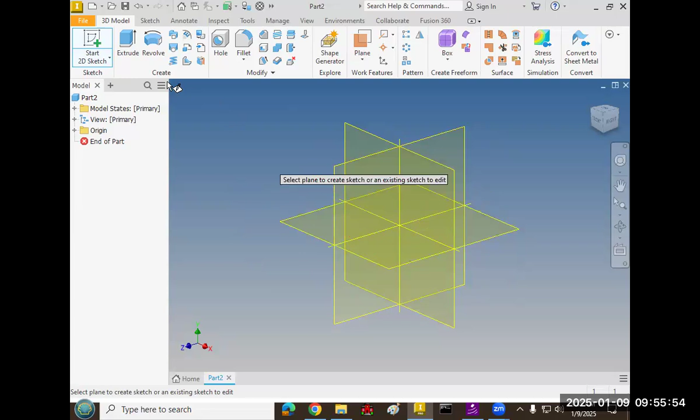Okay, so I'm going to start a new sketch and choose the XZ, or whichever the flat one is. Well, this doesn't really matter at this point. I need a 2-point rectangle, and I strongly recommend, again, starting from 0, 0, because it will make sure your origin planes slice right along the edge, which means all of your offsets will be multiples of 2 plus 1. So like an offset of 1 inch, 3 inch, and so on. But you'll see in a second.

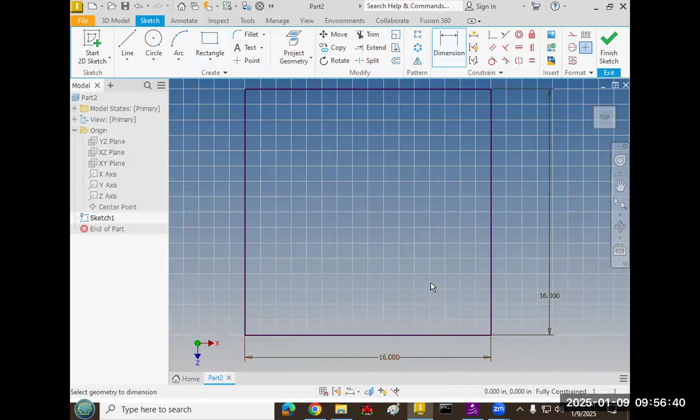We need to make this 16 by 16, home to zoom out, and then we're just going to finish sketch and extrude. And there's only one thing there, and the default's 1. Perfect. Okay. If you want to do some sort of embellishment on the end, like slanted, and you really should, it's not too much difficulty.

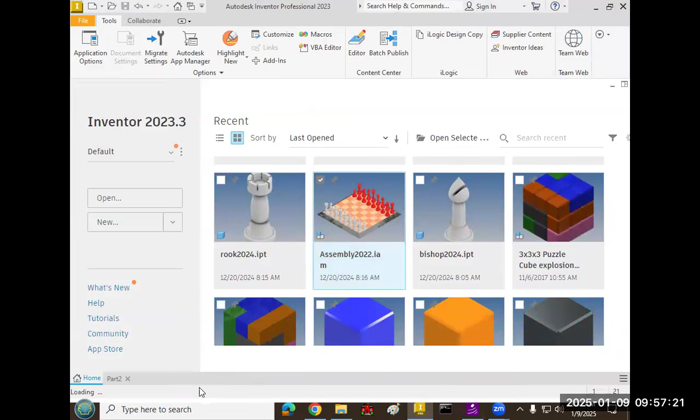Like in this old assembly, which I don't know why I decided to do that. It's going to take forever to open. But there's a chamfered edge, I guess, on the outside here, that slanted face. Make sure that extends beyond the 16 by 16. Okay, we want the 16 by 16 to be the plane surface, and we are going to be stuck waiting

for this to load because I made a poor choice. And we will all suffer for that poor choice.

And we continue to suffer.

There we go. Okay, so you can see here in this finished assembly, there is the plane surface, but then there's also this slanted extension. Start with the plane surface, make it 16 by 16. We're going to bring the image of the chessboard and make what's called a decal on top of it. And then after that, you can do like a rounded edge or some stair steps, or raised so it looks like an arena or something. Your call, it's creative stuff.

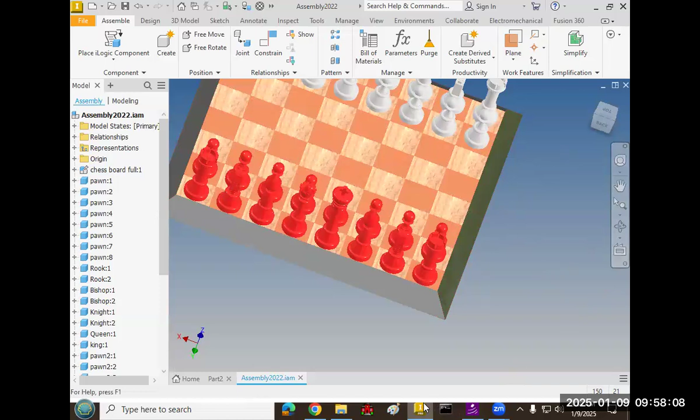But either way, we have a 16 by 16 inch panel that's flat with a 1-inch extrusion. And the way you get the image on is we need to start a 2D sketch on the surface. Orientation doesn't really matter, but I always like to work at it so its top is readable. And we are going to import an image, which is this one right here. That should bring up the Finder window, and you're going to choose the image that you just saved to your documents.

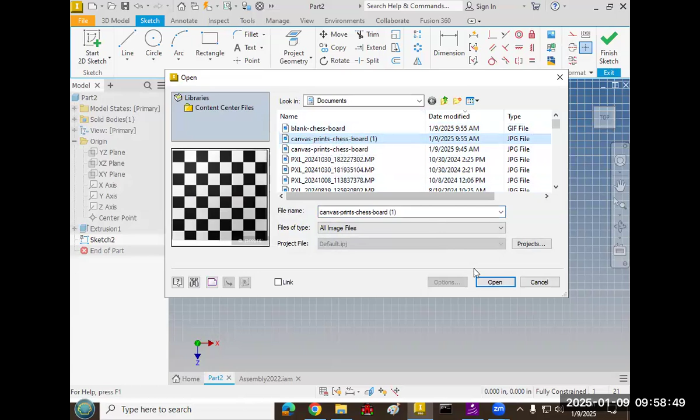Okay. And when you bring it in, you might think, let's snap it to the edge and constrain it. But you don't want to do that, because if your chessboard image has a border and you snap the corner of the actual image to the corner of the sketch, you won't be able to get rid of that border. It's a little not intuitive, the way the part that doesn't move; it's not like an image in a Word document or something, because it kind of tilts.

I don't know how you figure out which corner is going to be the one that doesn't move, but play around with it a little bit, try to get just the grid or just the checkerboard on the purple square area, and that's actually a little big. You can't do just sideways, it stays scale. Try your best. The better you do now, the better it'll be later.

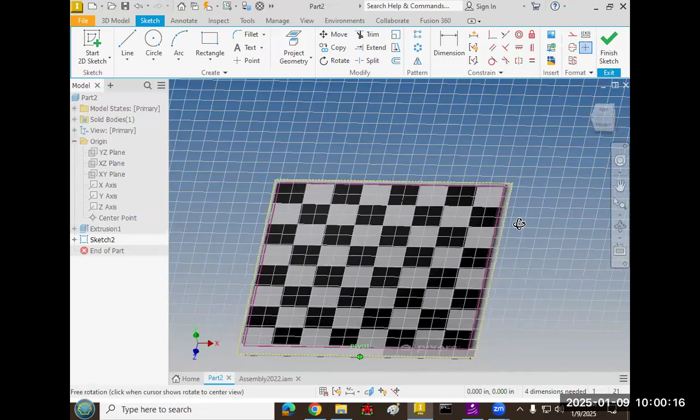Okay, so you can see I have the image extends beyond the surface, and that's, like I said, to get the border off. Once you have that good, you're going to do finish sketch. Make sure you do this next step, because you can hit finish sketch and it looks right, but it won't show up later. It's still just a sketch. You need to make a decal, like a sticker.

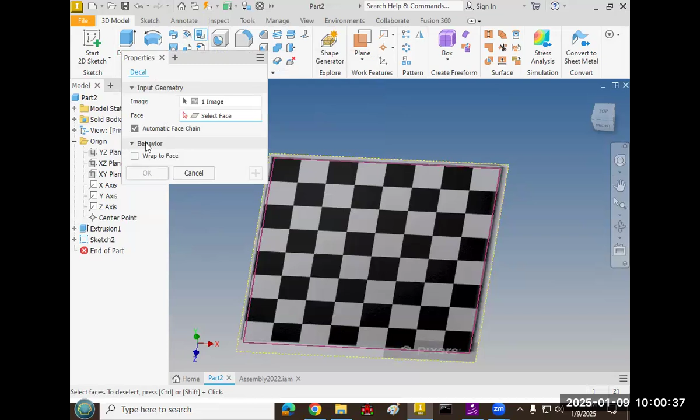When you click on decal, there are two things. The first one is the image. What image do you want to decal? The image you just did, click on it. And then what face do you want to decal it on? The one we just sketched on. And then hit OK. And now you can see it cuts off the edges cleanly. Unfortunately, I still have that watermark, but that's going to be fine for now. And there is my checkerboard.

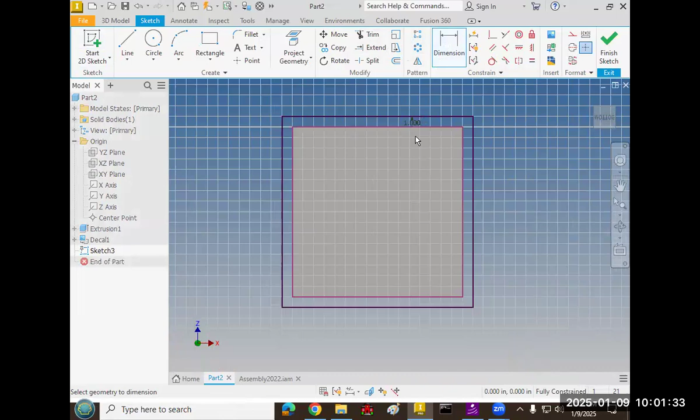You don't have to use a black and white one. Any standard checkerboard is fine. And I do want to make an extension there. So I'm going to start a sketch. I'm going to do an offset. Offset is this one; if you mouse over, you can see. And if I click the edge there, it'll make that shape. And I'm going to make it exactly 1 inch offset because I think it'll look good with the extrusion.

I'm going to finish sketch. I'm going to extrude just the rectangle I made, and I want this one to extrude up. Okay, so I have an extra inch, which looks fine also. And how about I fillet it? I'm going to fillet just the top edge here. This is all design stuff, it's your call. Maybe like 0.5. I think that looks pretty good.

And if you want a different material for the board, you can do that. Depending on your resolution, you'll be able to see either 0, 1, or 2 of these drop downs. If not, there's an extension double arrow. Change the one that says default. Default is the one that lets you change the color. Generic is the one that changes the material. Generic does change the appearance sometimes, but it's not as good, and it doesn't give you a little preview. And green polished is fine with me.

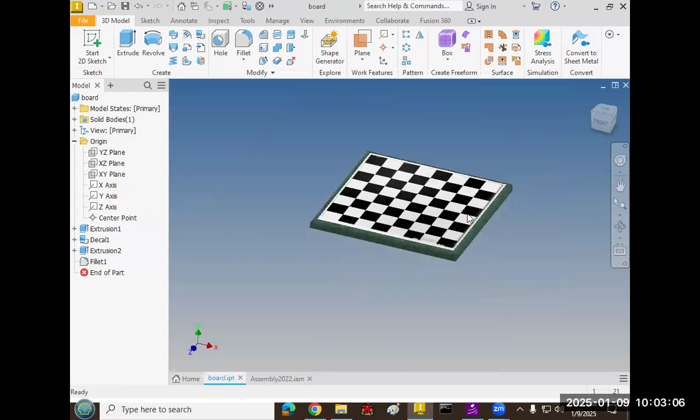So I'm going to save it, and I'm going to call it board, making sure that it is in the same folder. Although it's not super critical, it helps. Okay, so I have a part file for my board. Now, in order to do the assembly, I need to open up each of these pieces. I guess I don't have to open them all up at the same time, but why not? I can choose all of them. I opened the bishop already. And then open selected. Did I get them all?

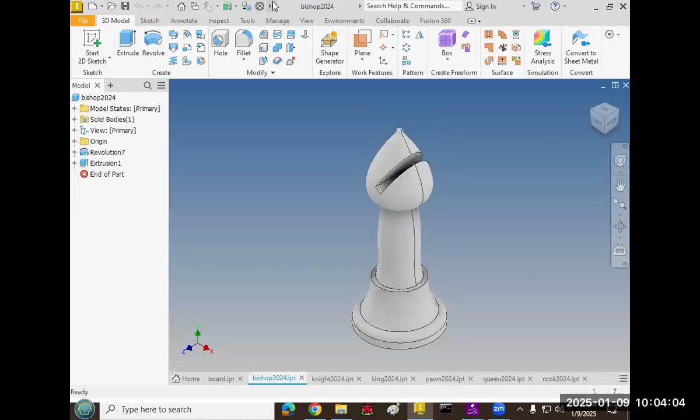This is my old assembly, I close that. Okay, I have bishop, knight, king, pawn, queen, rook. So I'm going to go through them one at a time. This is my main one. Make sure you do save as, and you can just call it something -2 or other team. Hold on, am I already in? I'm in default. Okay, so I'm going to choose the first team, and I'm going to do red versus green. Going to pick my 2 team colors.

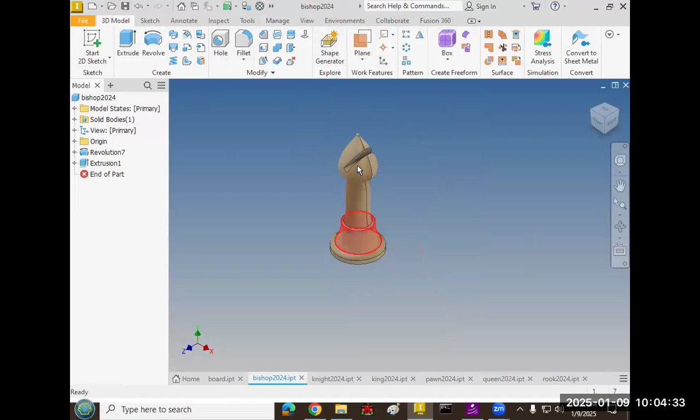Plywood is going to be one of my teams, and we'll solve the other one. So I'm still in the first part file, the first bishop. I changed the color. It made the color of the first team, which I need to remember is plywood. Saved it. Now I'm going to do save as. Call it bishop

-2 is fine. And then I'm going to change the color of that one to the second team, and I need to remember the color. Is that going to look? I don't think that's going to look different enough. Green, and I really shouldn't be spending that much time on this. Okay, that's fine. Who cares?

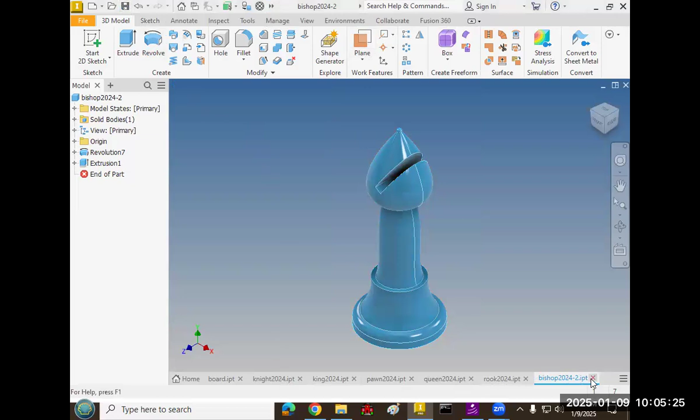So it's just for me, it's called Sky Blue. No, I'm gonna go with Sky Blue Dark as my other one, and my first one's called Plywood. So now I have 2 bishops. I have bishop-2, and it closed bishop 1. So I have 1 bishop and then the other bishop, plywood, and make sure you're not doing exactly the same colors as me. Just do original stuff.

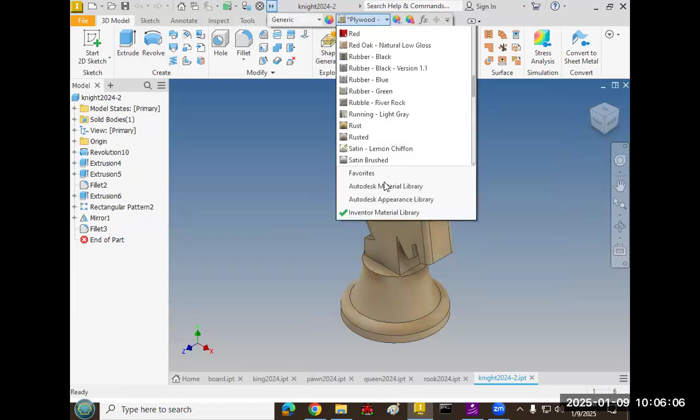So my first team here is called plywood, and I actually do need to do all of these so that the assembly looks right. So there's the first one. I'm gonna do file, save as, and call it knight-2. That makes a new file. And in knight-2, I'm going to change it to my other one, which is Sky Blue Dark. Save it and close it.

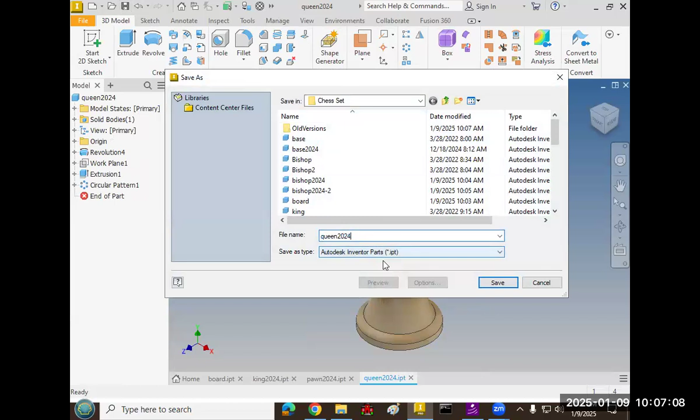And God, I hope the audio is recording.

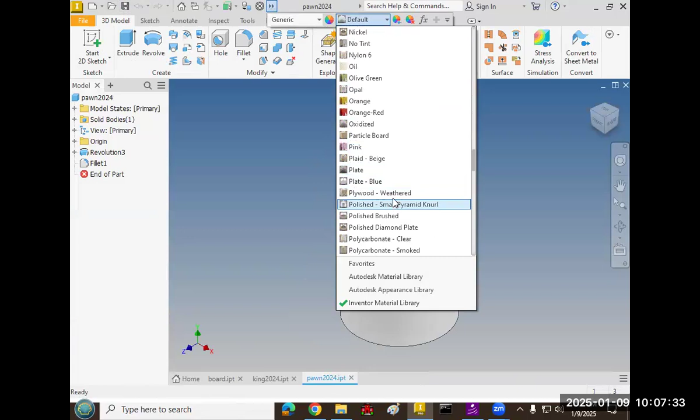So queen-2 is my blue queen, and I just need pawn to change it to my first team. You may have already chosen the color of your first team. That's fine. My first pawn, and save as is pawn2024-2. And we'll go sky blue dark and save, close the pawn, and one more.

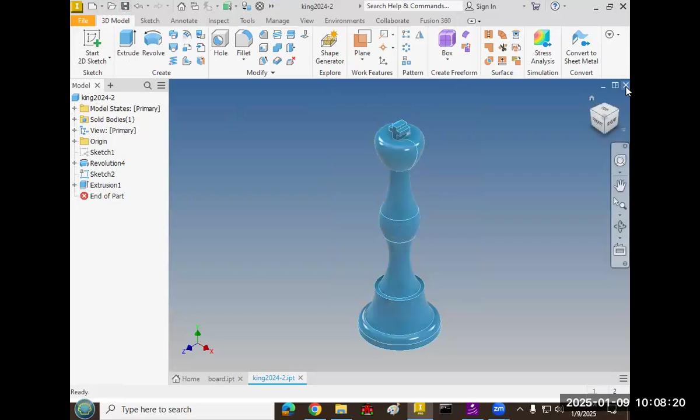And first team. Save, file, save as. All right, so this is the last one that I need a second color for. Sky blue dark. And save it. And we can close all of the part files. I don't even need the board open at this point.

So now for the assembly. New, from our special quick drop down, assembly. And I don't know why place iLogic is the standard. We just want regular place, and it usually pops up.

And the first thing that you want to do, and in fact, I need to make sure I don't dox myself here, or somebody else. Let's see, where is it? Documents. Not in documents. Puzzle cube, Menchie cube, train. Oh my God, where is it? Chain. Jet Set project. Where is it? Sorry, folks. Yeah, there we go.

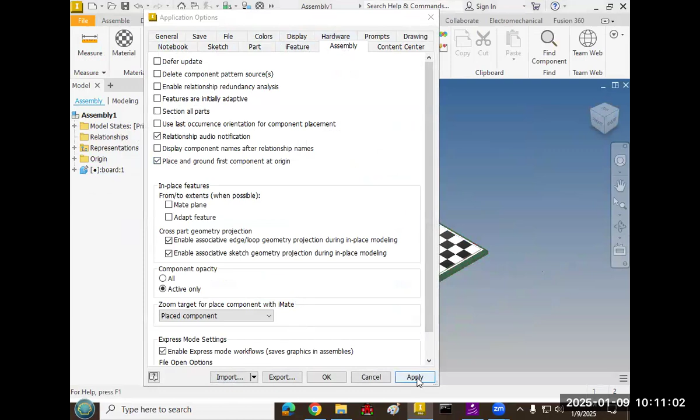That means it's grounded. The way to make sure the first thing comes in grounded is in Tools, Application Options, Assembly, and Place and Ground first component at origin. And then OK, apply, close, whatever. But if you didn't do that, it won't come in as grounded, in which case, if there's no push pin, when you bring the first thing in, you need to do right click and check grounded. That will lock it in place and make sure everything else moves when you constrain it.

Now, the other thing you'll notice is that you can turn on the visibility of the YZ plane, right click visibility, and for the other one, for XY, right click visibility.

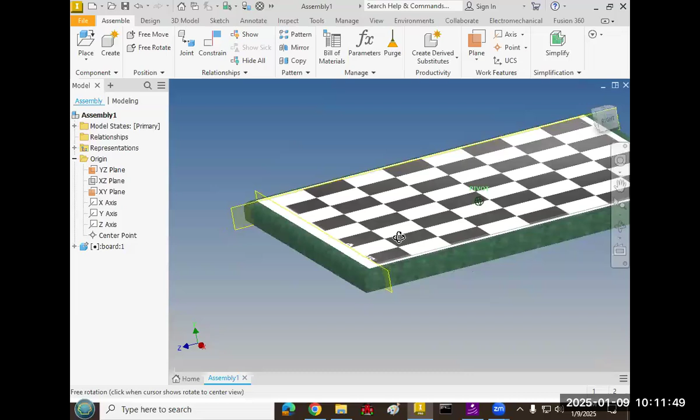Don't worry about whichever plane you drew on, because that's going to be the flat plane. And hopefully you can see those origin planes slice right through the edge of the plane surface. It's pretty close. And that is good because that will allow us to do a good offset.

Okay, so let's do the pawns first. I want to place a pawn from one team, and I'm just going to place it out in space. I know I'm going to need 8 of them. 1, 2, 3, 4, 5, 6, 7, 8. Right click, OK. It's probably easier if you just do right click and open up the pawn

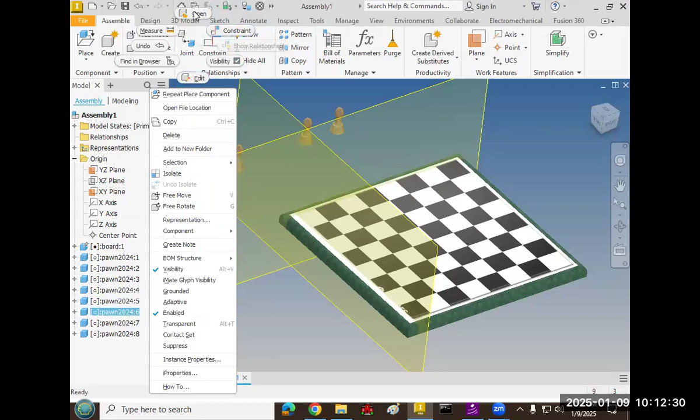part file, and you can then go to its origin planes and do right click visibility on the 2 planes that are vertical there. And then when you go back to the assembly, you can see they're all on there. And it'll be easy to select the planes that we want to do offsets for.

Okay, but for all of these, the first constraint is going to be the bottom surface to the plane surface of the chessboard, because they're always going to be flat. So we'll just do constrain and mate constrain, and we want to mate the bottom flat part. And in fact, you don't really need to bring up the planes first.

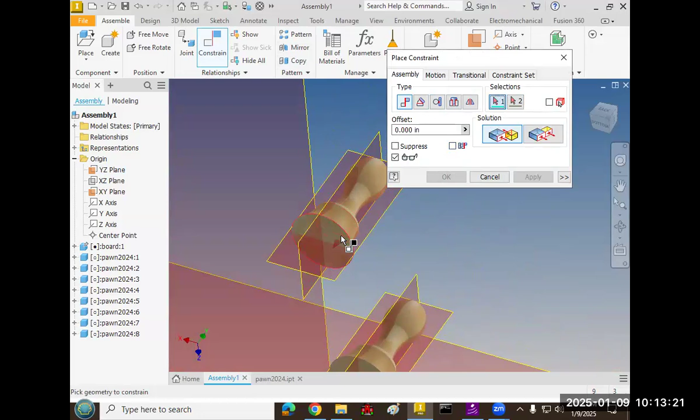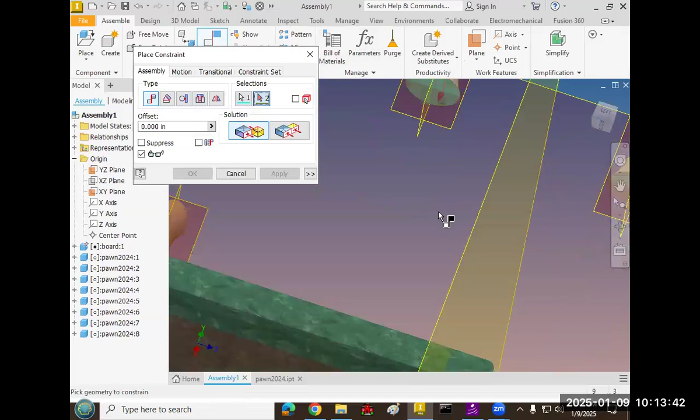You can do this first, but make sure you are selecting the entire bottom face of the chess piece and not the edge, which will give you the green dot, and not the center axis. It's just the flat face. And if you don't have a flat face on the bottom there, it has to do with your revolution. But we'll go ahead and just flat constrain all of them, which hopefully doesn't take that long. It might take you a little longer if you don't know the keyboard shortcuts.

I didn't need to do that. If you hit apply, it just doesn't close the window, which is faster. The colors are strange on this side. I don't know why. It shouldn't fill the board that way. I don't know what it's doing. But either way, here we are. Constrain, mate that surface to that one, apply, and I guess 2 more. We want the flat surface there.

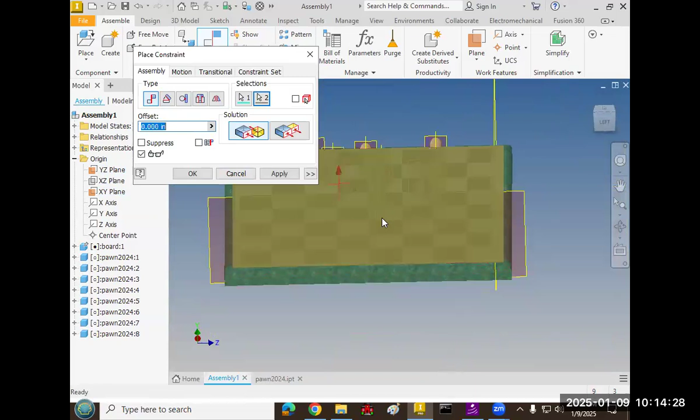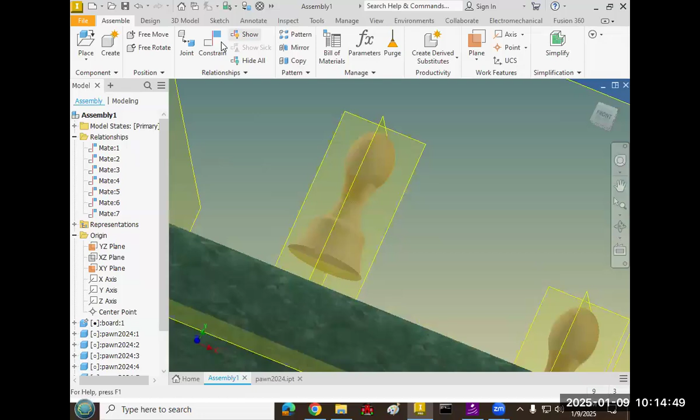Hit OK. And you need to pick, there is a correct side for this. It looks like the chessboard is the same regardless of what side you're on, but it's actually not. And I can't remember which one is the correct one. I think it's this one is my guess. Not sure, but it's fine. I'm not worried if you get that wrong, especially since I don't know.

Okay, so regardless, each of these pawns is pawn 1, 2, 3, 4, 5, 6, 7, 8. They don't need to be in order directly. Like pawn 1 would go there, pawn 2. It might make it easier later on to find them, but the key is they're just all along this second row from the end, and you'll see what happens in a second. This one is 5. This one is 7, and this one is 8.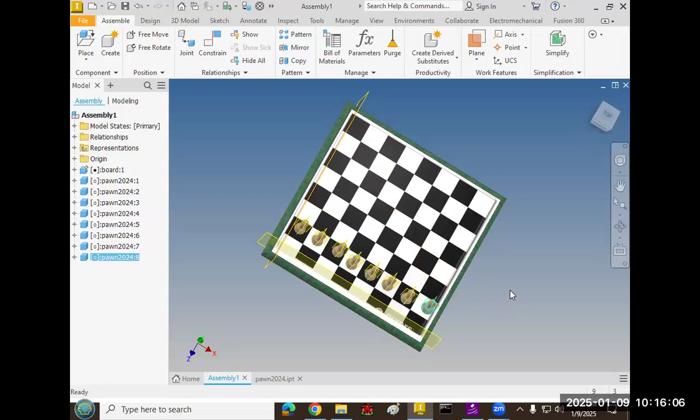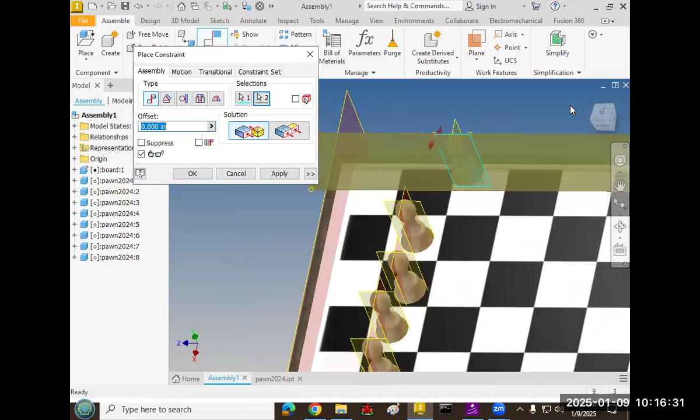Okay, so for each of these, we are going to do a pair of offset constraints. And the reason for that is those are the things we're going to use to animate later in order to make the chess match happen. So we're going to do constrain, and we need to do a constraint between this plane and the plane going the same direction. And you can see it pops over to the plane because we did a mate constraint for it. But we don't want it to be all the way over the edge.

We want it to be centered on this column. So we're going to do an offset of 1. Sometimes it goes the wrong direction. If you do an offset of 1 and it pops out the wrong way, you just need to switch it to negative. In this case, it worked positive for me. Hit OK. And now this piece, no matter where I grab it, is going to stay flat on the board, and it's going to stay in its column, file, rank, I don't know.

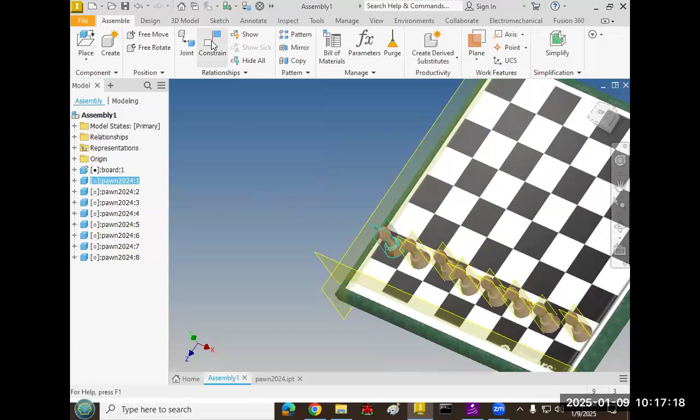And then I just need an offset of the other plane to the plane it's parallel with. And sometimes mate doesn't work. So I choose the plane, the origin plane of that piece I'm working on. And then this one, if it doesn't pop over, that means it's over constrained, which is fine.

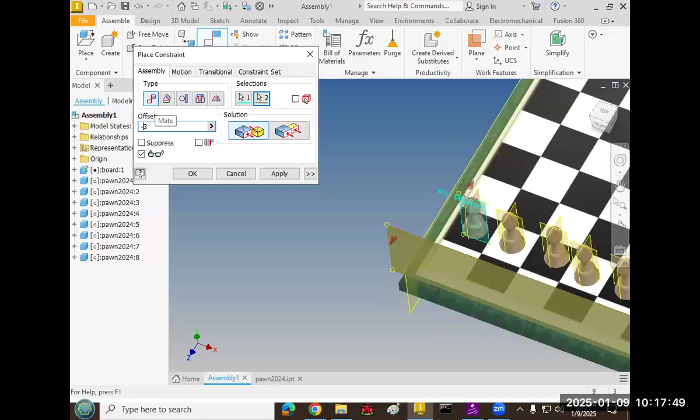It just means you have to switch to flush. So this one, I want it to be in the center of this. So one block is, the center of it is 1 inch. The other one is 3. It's going to be 1. Okay, so it went the wrong way. Let's do -3. Hit OK. And this one is now fully constrained. You can grab it and it doesn't move.

Okay, I'll do the rest of them. Try to do it quickly. And that offset would now be, this offset was 1. So I need to offset this one 3. Good. Apply, and then this face to this face. This one is also an offset of -3. Okay. This one to here is now 5. And this one to here is still 3. Well, it's always -3.

And I'm not going to do all of them, especially since there's going to be two sides. But this side, this offset is now 1, 3, 5. It's offset of 7. And this one is an offset of still going to be -3. Okay. And so all of these are fully constrained. These are not constrained yet. You need to constrain them all, but there's not enough time. We'll try to save some time.

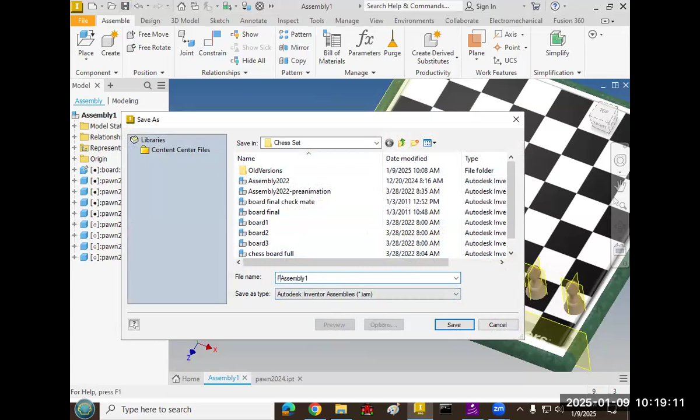Okay. And let's go ahead and you should probably save it. Why not? Chess set. How about full assembly? Something that makes sense. And yes to all. And hit OK. And I can now, once it finishes saving, go back to that pawn and turn off the visibility of these things. Okay, and now that's fixed.

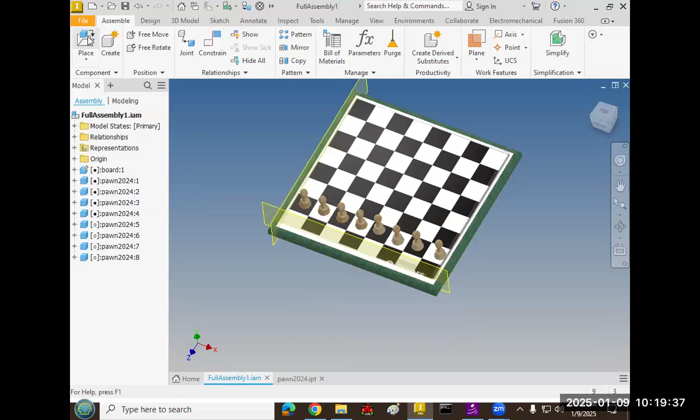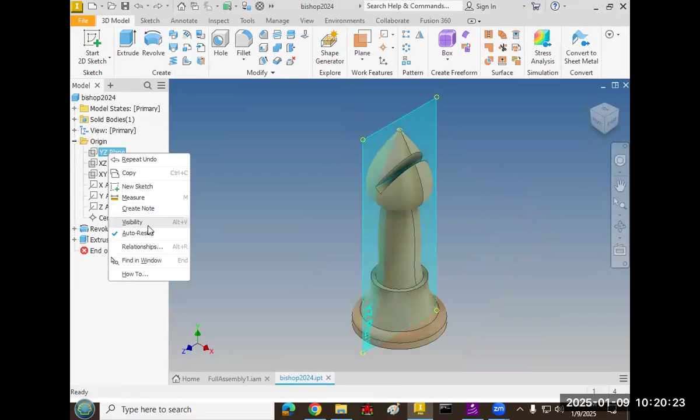Okay, and now let's do the pieces in the back. I need a couple bishops, which of course I need to first mate to the surface, mate the flat underside, and same thing with this. Hit OK. And the thing about bishops is that slot is supposed to face forward. So, oh wait, I need to go to bishop. I'll save this. I need to right click, open up that part, and then I'm in the part, Bishop. And I'm going to turn on the visibility of the 2 vertical planes.

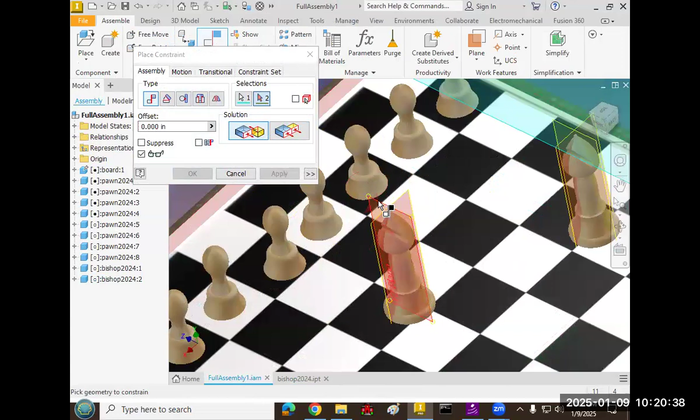And now using those planes to constrain, when we did the pawn, we just chose this side plane and the one going the same direction. But because I want it to turn, I'm going to choose this plane to constrain to the side, and we'll see what happens. Okay, it popped over there, and is the slot going forward or backwards? The slot is now facing backwards. It's difficult to see, but I want that slot facing forward. So instead of mate, I'm going to do flush. And that flips it around, hit OK.

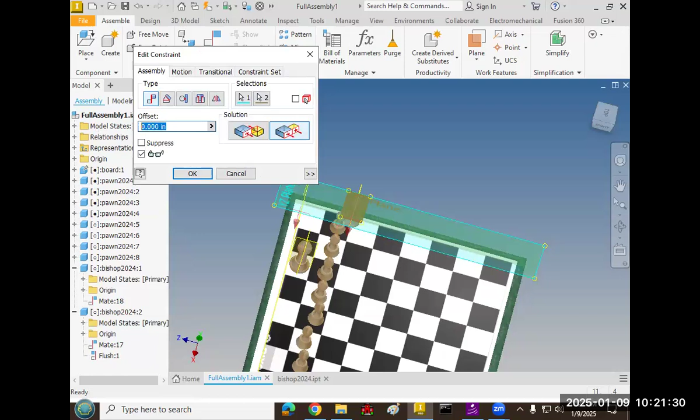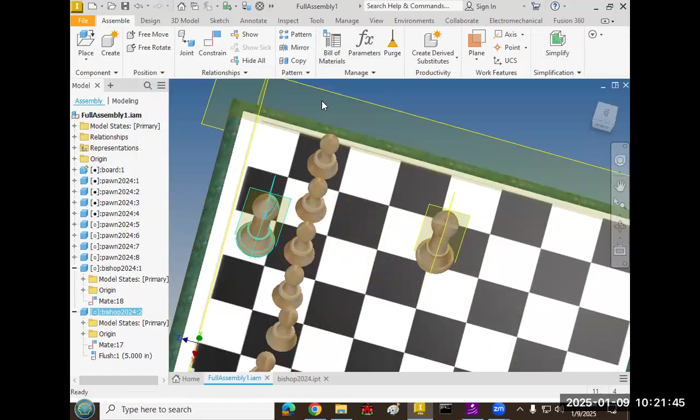Oh wait, no, I need to make that one the offset because they're supposed to go here, 3 in. So the one that I just did, is this the one I just did? Yeah, there we go. So it's this one. I need this to be an offset of 1, 3, 5. And yep, +5. Probably could have chosen better colors, but okay, so this bishop now only moves this way because it's constrained to be 5-inch offset from the side. Used a flush to make sure it points the correct direction. And then I just need to lock it in from the back.

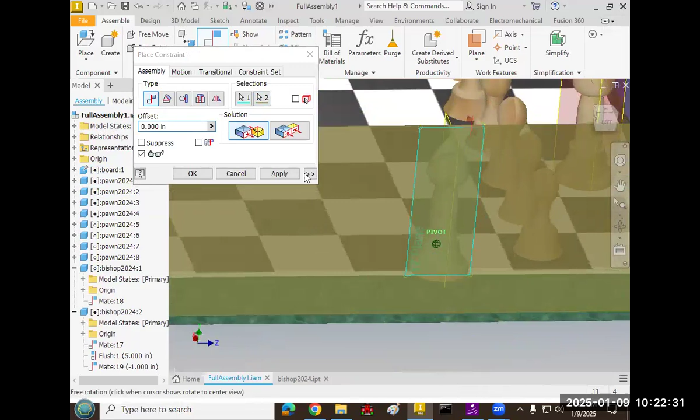So we'll try mate of the plane that goes this way with the plane that goes this way. And if it doesn't pop, it means it needs to be a flush. And the back row is just an offset of 1, but appears to be -1. Okay, and then the same thing for the other side. This bishop needs to go here and constrain this face to the side. Oh, no, I don't want mate. I want flush. Oh, no, I just straight up chose the wrong planes.

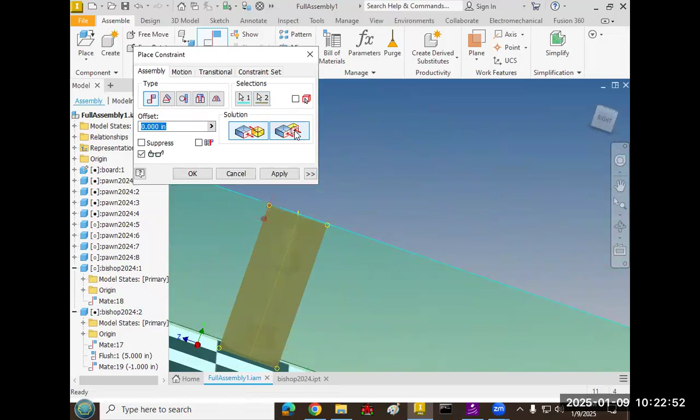Okay, so we can constrain this plane to the one that slices across. And there we go. You can see the slot points back. So I'm going to switch it to flush. And I want it to be in this space over here. So the offset is 1, 3, 5, 7, 9, 11. Positive 11. Hit OK. And now it's roughly in the correct location, but I need an offset from the back. So I'm going to do constrain, this one with that one, and an offset of 1 or -1.

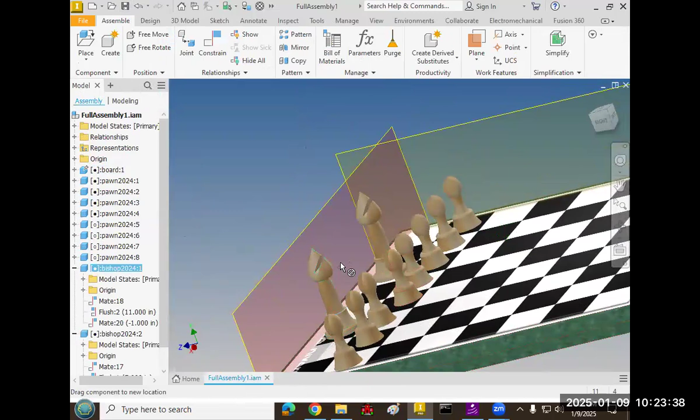Okay, and I can turn off the visibility of the bishop vertical planes, save this, close that. And now our bishops are in the correct location. You should be able to grab them and not have them move. Okay, let's do...

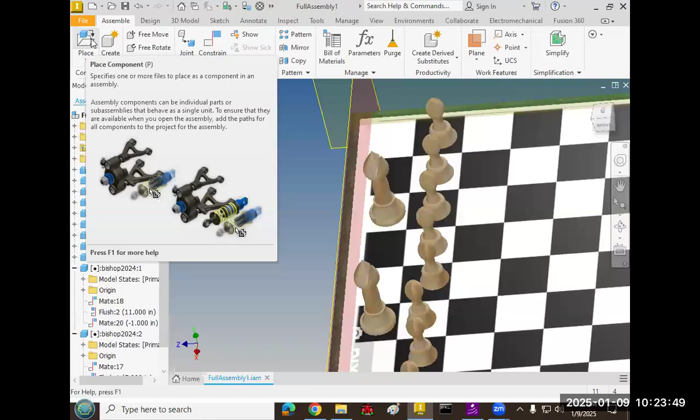Yeah, hold on a second. Wait till somebody comes back. I guess that's probably the better plan.

Okay, so I need 2 rooks. So let's place rook2024. There we go. And I need 2 of my rooks from this team. First thing is mate the top of the chessboard surface to the bottom surface of the pieces. No, that's not what I meant to do. I meant to do that.

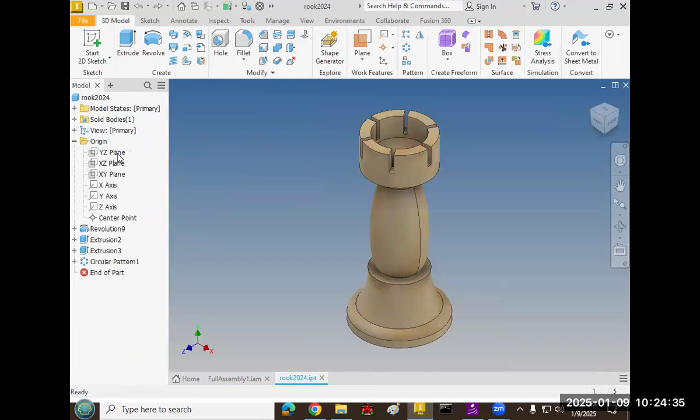Okay, so I have 2 rooks. One's going to go there. One's going to go there. And I want the vertical plane, so I'm going to open it. Right-click, open. Go to origin, right-click, turn on visibility. Right-click, turn on visibility. Go back to the assembly.

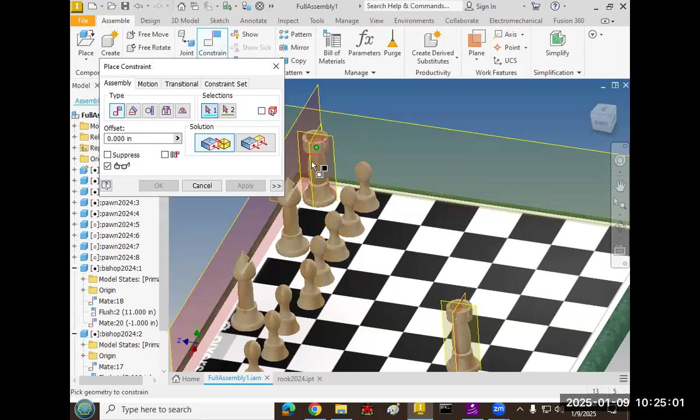And let's mate these. It's not directional, so that's fine. And I want it to be 1 block off, so it's 1 inch offset. And then the distance from the back here is going to be also 1. So I want to constrain the plane that goes that way to the plane that goes that way. And if I guessed ahead, it would be -1. Nope, +1. Nope, it is -1. Yeah, there we go. Okay, -1.

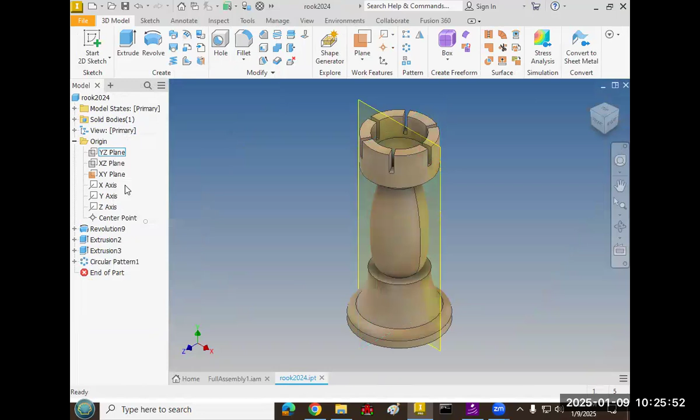And then this one over here is that to that. And if I want it to be over here, it's an offset of 1, 3, 5, 7, 9, 11, 13, 15. Offset of 15 or possibly -15. And at this point, it only goes that way. And so I'm going to constrain the distance from the back plane to that plane. And it's an offset of 1, -1. There we go. And we're done with these 2 rooks. So let's turn off visibility there, save it, close the rook.

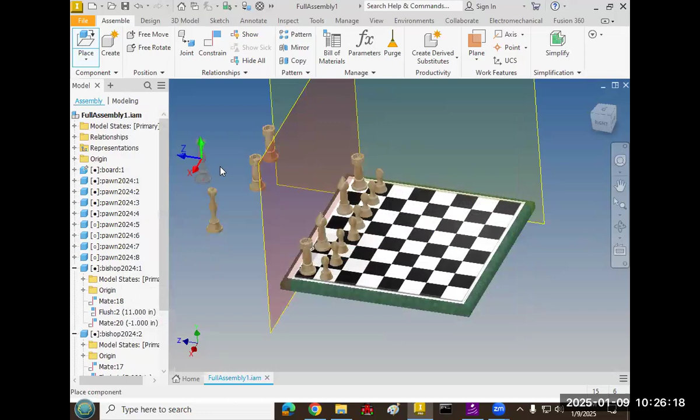Okay. And we only have a couple more. We have 2 knights, a queen, and a king. Let's just bring them, well, rook, need 2 of those. Actually, gonna just bring out the king and queen at this point. Also, king 24 and queen 24. Okay, and let's mate the bottom surface.

There's somebody ahead of you, and there's 2 people out.

Okay, and so there's that, and we're still mating underneath surfaces. Looks like an unconsumed sketch on the king there, but we'll do that one to there. And we're still mating that one to that one. Okay. All right, so the pieces we still need to constrain are, oh, did I bring out extra rooks? That was dumb. All right, sorry.

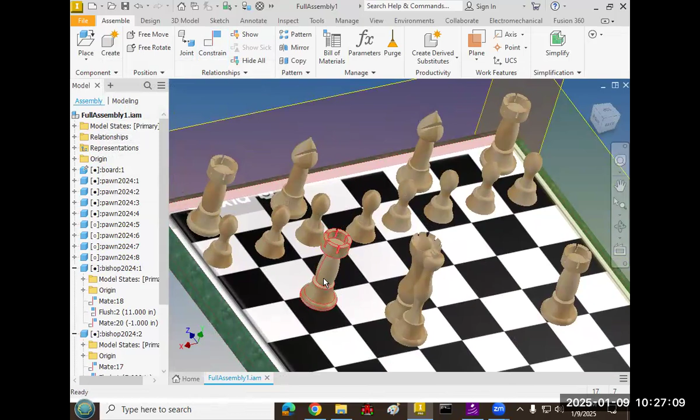Place knights, that's what it's called. We want knight 2024. Okay, so I need 2 of those. Constrain underneath.

2 people in front of you, 2 people out.

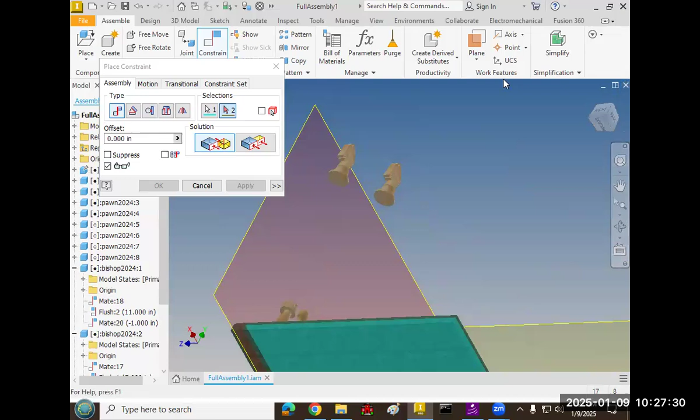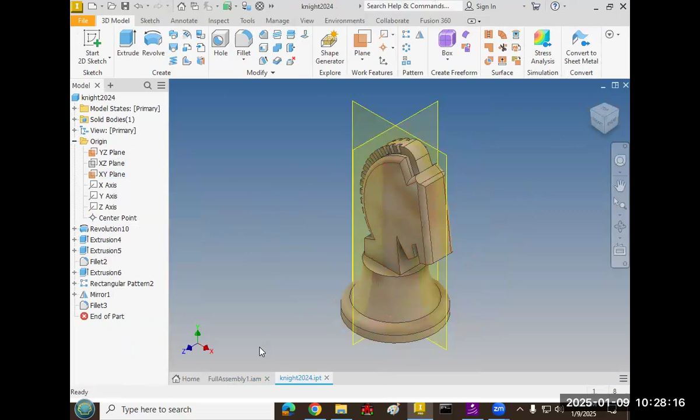That one goes to the thing. And that, nope. Not the green dot, the surface. There. Okay. And let's do the origin plane. So let's open up the knight file. You probably double click on it. Am I right with that? Nope, that's not what I want. Right click, open seems to work. And this one is like the bishop where it is directional. So we're going to turn on the visibility of the vertical planes, and we'll go back to the assembly.

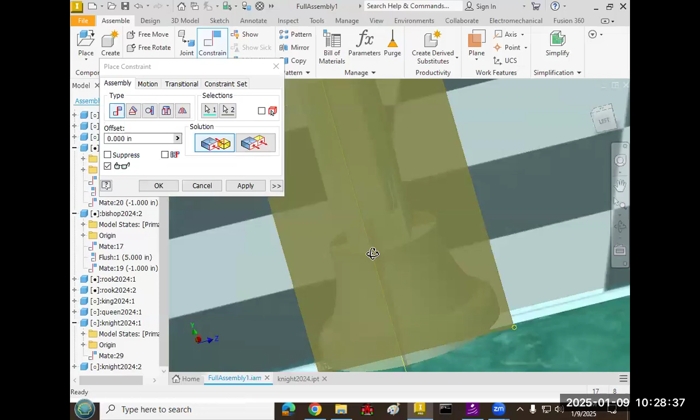And because I want these to be turned, I'm going to not choose the one already going the same direction. So let's mate. And I'm guessing it's going to be flush because it was the case for the other directional one. Nope, I chose the wrong one. I need to get rid of that one. Which one am I working on? It's that one. Okay, I chose the wrong plane again. Constrain, I want this plane to go with the one that slices through the head, which is this one. There we go. And it is facing the wrong direction, so I'm going to switch to flush.

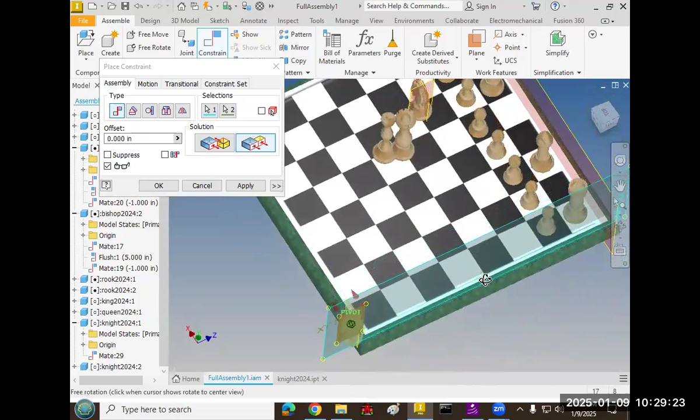And I want, why is it, I wonder if my keyboard is dying. That's probably what's happening. Okay, I want it to be on this column, which is an offset of 3. Hit OK, and now it should be in there. And I want it to be 1 inch from the back because that's 1 block off. And an offset of 1, -1.

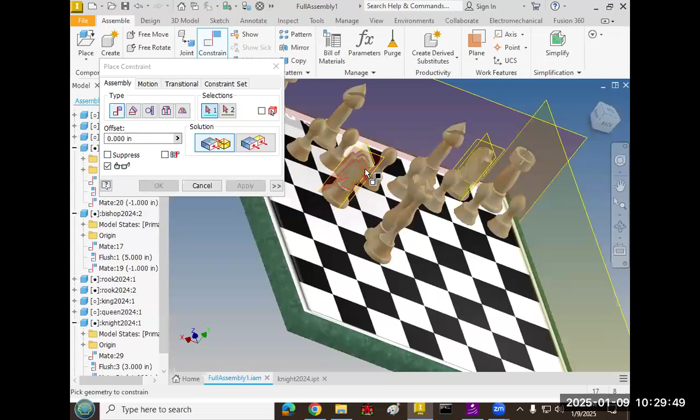And this one, the same thing. We will do the plane that slices through the head with the one that we want parallel. And we want to switch to flush, so it goes the correct direction. And before we click OK, we want an offset of whatever puts it here, which is 1, 3, 5, 7, 9, 11, 13. An offset of 13 puts it there. So it's going to be -13. There we go. And hit OK.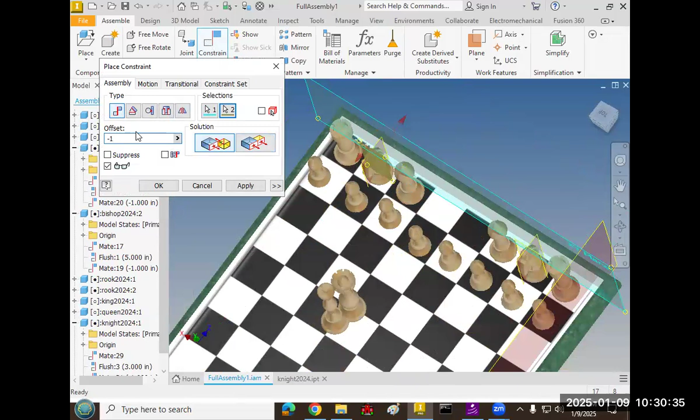And this one also needs to be 1 inch from the back. So we'll mate, offset of, I'm guessing, -1. There we go. Okay, go back to the knight file and turn off the visibility of that stuff. Save the knight file, close the knight file. And then the last 2 are just the king and queen, which I've already constrained to the surface. I just need to turn on their vertical planes, which I think you can do from the assembly, but I don't think it's persistent.

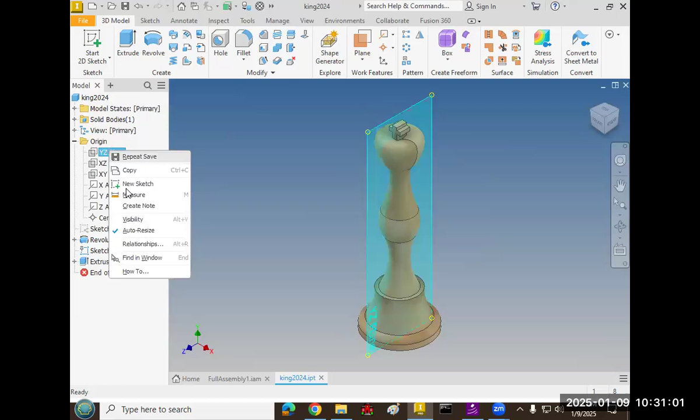If you don't know how a chessboard is set up, you can look it up, but there's a thing called queen to her color. So whichever team is the lighter color is the one where the queen gets placed on the lighter color block. And on the other side, the darker color queen would go on the dark space and the king on the light space. But since this is the lighter of my 2 colors, this is where it's going to go.

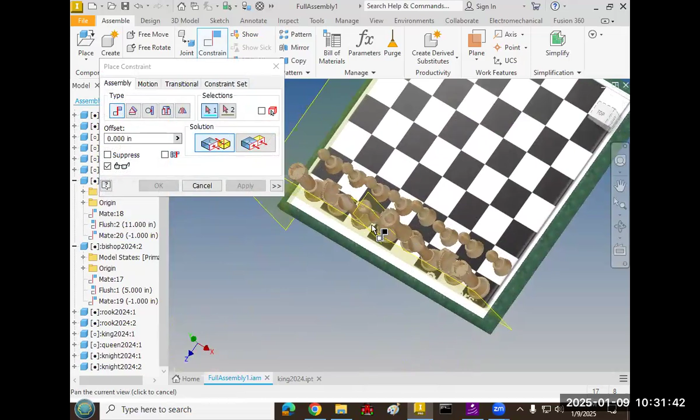And I don't have the origin planes for the king on yet, but I actually do want to make sure the king is facing this way so that the cross is towards the front. And so I'm going to mate these 2. That looks fine. And it's on the back row, so the offset is 1, -1.

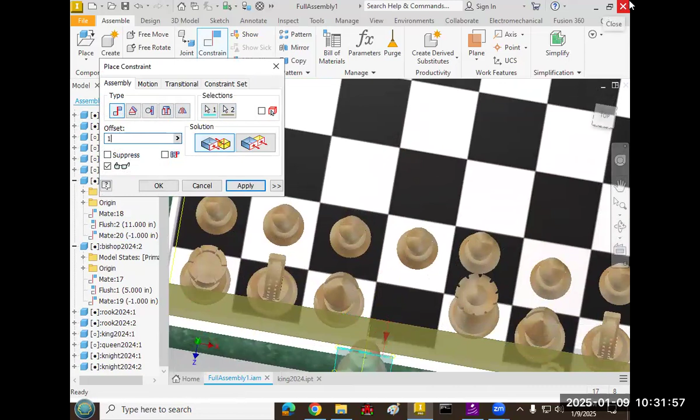And then we just need to constrain it sideways, and its offset is 1, 3, 5, 7. And the king is constrained. Let's turn off its planes and save it and close it. And then just the queen.

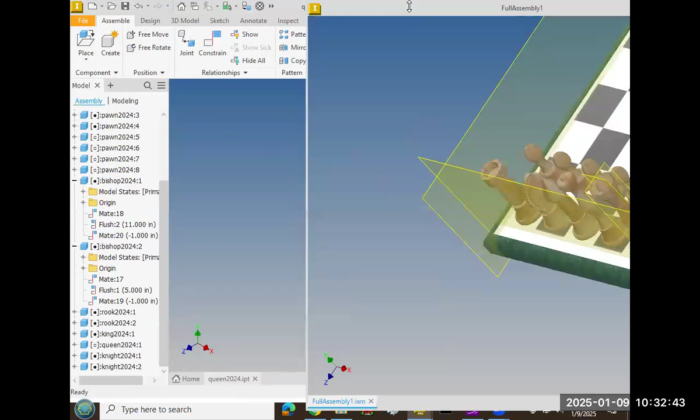Turn on the visibility of its vertical planes. And we'll do the same thing. That's not what I wanted to happen. Uh-oh, that's not good. How do I get that back? What happened?

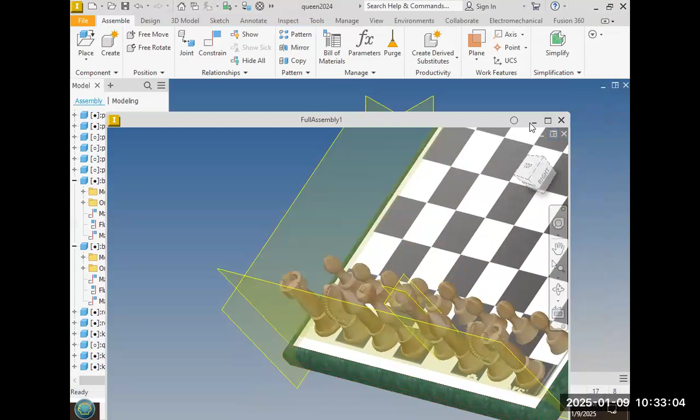How did I get another window? I don't like this. What if I save it? And then close it. And then open it. Full assembly. Okay, where is it? Sorry, folks. It's one of these. And it's called FullAssembly1. There we go. Please be in the window.

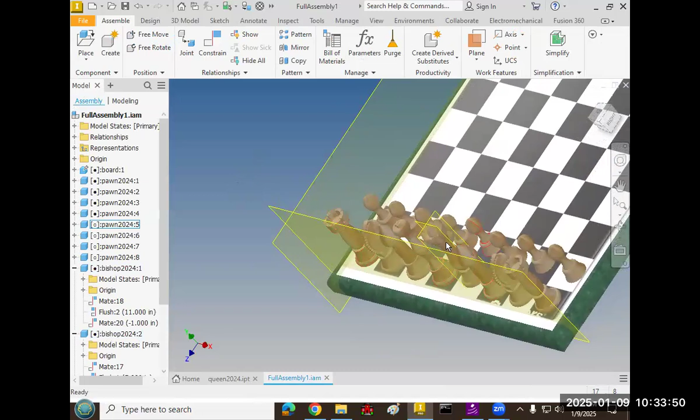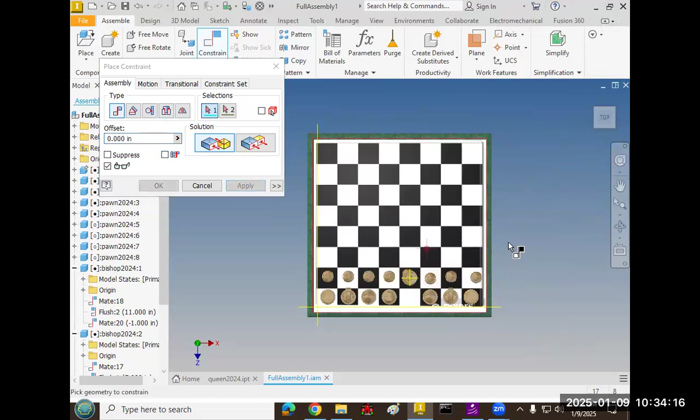Excellent. All right, so I need just to constrain the queen to the side, this plane to this plane, and its offset is 1, 3, 5, 7, 9. And again, I think my keyboard is dying. Okay, 9, and then the offset this way. It's on the back row, so its offset is 1 also, -1 also.

And then we can turn off the visibility of its vertical planes, save the queen file, and close it. And there you go. You have one of the two sides fully constrained. You just need to do the other side. I'm not going to do the entire other side, but I am going to do a couple of them, especially things like the knight. So knight 2, I need to make sure is facing the right direction. So I'm going to do the same thing.

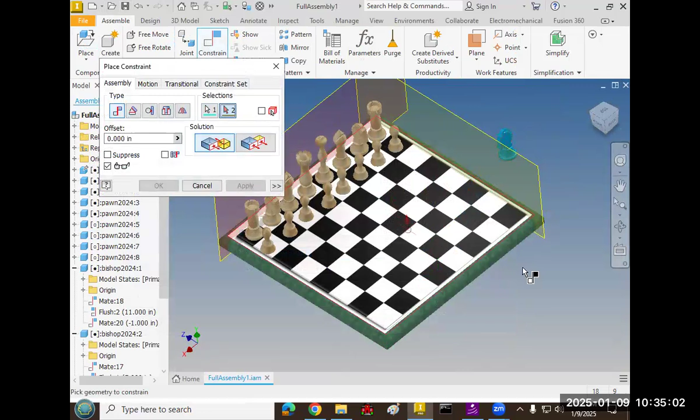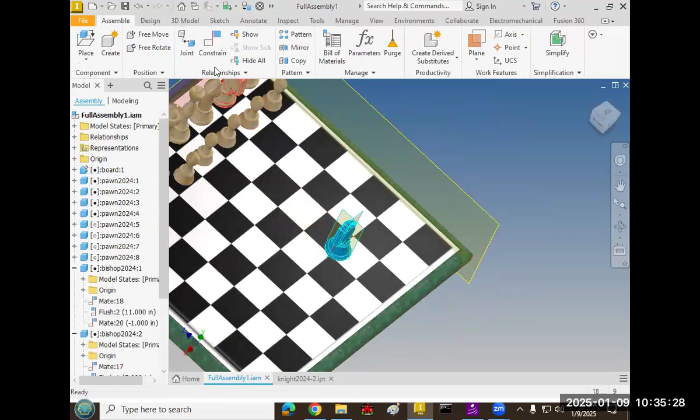I'm going to do just a regular mate of the surface of the board to the underside of that. Hit OK. And again, let's open up the part file and turn on its origin planes. Right-click visibility, right-click visibility. And in the assembly, I want this to be facing the other team. So I'm going to constrain the plane that's going through the head with the one that's on the side. Is it facing the correct direction? It is.

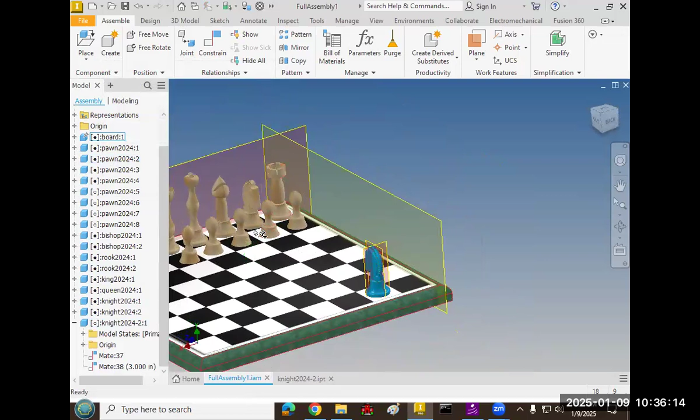That's good, except I need it to be an offset, so I shouldn't hit OK yet. It's this one. Right click, edit. And I want it to be in the second row opposite this one. So it's an offset of 1, 3, possibly -3. No, +3 is okay. So this one is supposed to go here, opposite this one, but we're doing offsets from this plane over here. So it's going to be an offset of 1, 3, 5, all the way up to 15 for the back row here.

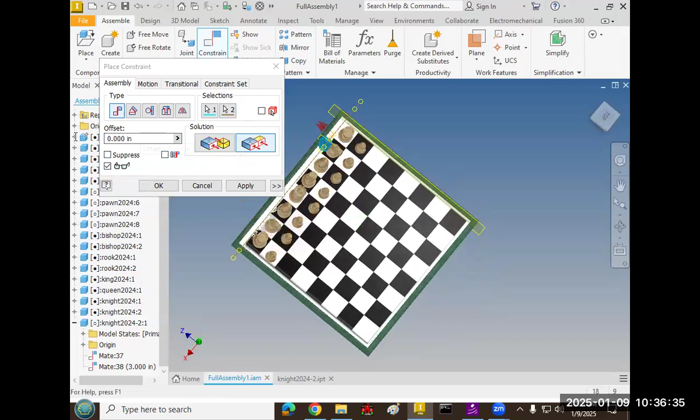So I want to mate this one to here. If you have show preview on and it doesn't pop, you need to switch to flush. It just means it's over constrained, and its offset to get to the other side is 15. And hit OK. And you're going to do that for all of them.

Okay, I think that's enough information. Well, do I have these on here? Yeah. So the board's main origin planes are turned on inside of the assembly, not inside the board file. But for the origin planes for each of the parts, in order to do the constraining, you need to open up the part file.

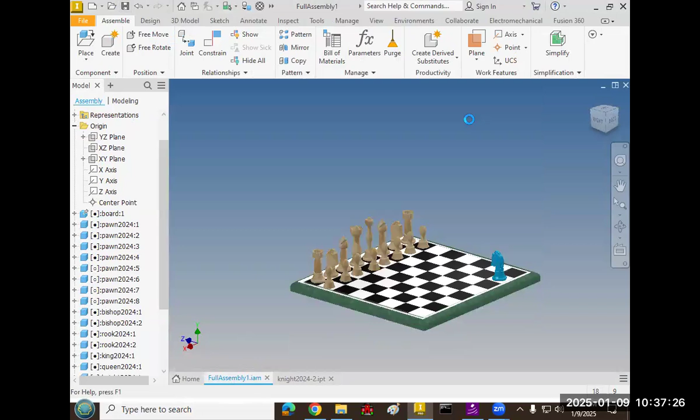And then when you have both sides fully constrained, you're done with the assembly and you will be ready for the animation. If you ever see a window where it has yes to all and no to all, just hit yes to all and okay. I don't really know what it does. I just know yes to all and okay works. Okay, and so that's where I'm going to end the video. Make sure you get them all in there and constrained.